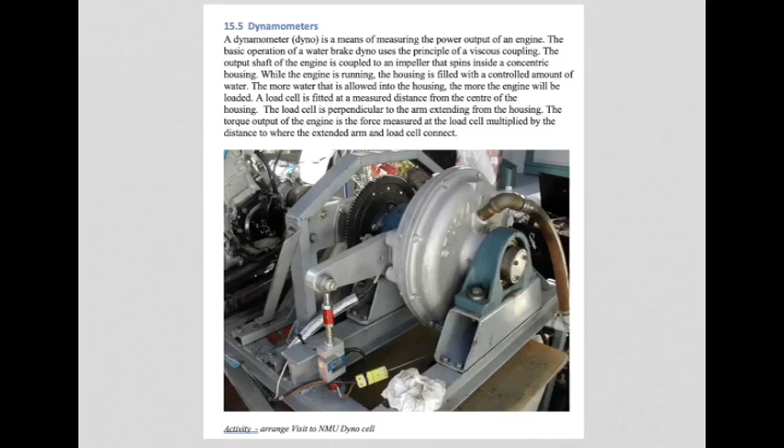So now would be a good time to add these two formulae to your summary sheet, and here it is in the most basic form. Power is torque times rotational speed. Here's the units defined: power measured in watts obviously, or joules per second.

Omega is our angular speed in radians per second, or if you prefer to work in revs per minute, it would be power is 2 pi NT over 60, where T is torque measured in Newton meters. And now angular speed is not in radians per second like it was in this formula, it is now in revs per minute.

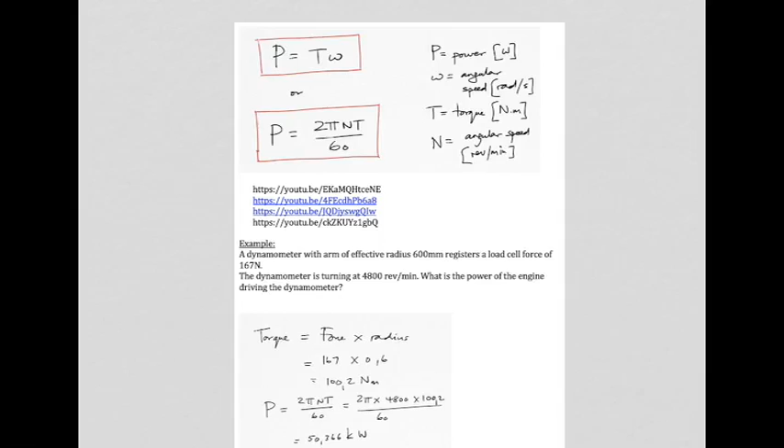At this point, I'd suggest you go and look at these various clips, which give you a number of different examples of dynamometers in action, which will better explain what we've just been through. You'll note that in some of those clips, the dynamometers are of the rolling road type, where they are testing the output of a motor car, and instead of removing the engine and connecting it to a dynamometer like in the first picture that I showed you, they instead put the drive wheels onto two submerged rollers, which are then rotated by the wheels of the vehicle, and those submerged rollers, underground or elsewhere, are connected to a dynamometer of a similar type to what we spoke of earlier.

So here's the simplest type of example. We are told that a dynamometer with an arm of effective radius 600 millimeters, remember what that was? That was the distance from the axis of rotation of the shaft to where the load cell was applied. That is 600 millimeters. In this example, it registers a load cell force of 167 newtons, but the dynamometer is turning at 4,800 revs per minute. What is the power of the engine driving the dynamometer?

Well, torque, as we said, is force times radius. So there's the force measured in the load cell.

There's the radius, obviously in meters. So we have 100.2 Newton meters.

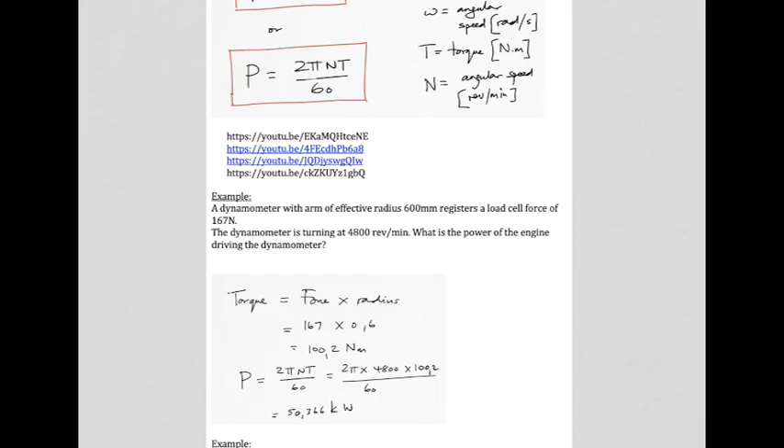Now we bring in speed of rotation, and we know that P equals 2 pi NT over 60. 2 pi times 4,800 revs per minute times the torque, over 60, gives us 50.366 kilowatts.

This next one is not a dynamometer as such, but it operates in exactly the same fashion. We are told a shaft runs in two bearings.

Whilst the shaft is running at 1440 revs per minute, there is a bearing drag of 2 Newton meters. Now that would indicate some problem with the bearing, poor lubrication, or a bearing that's starting to fail. The point is there is bearing drag, or the bearing outer housing is being carried along with the rotating shaft, to the extent of 2 Newton meters.

This is assumed to be caused by bearing friction, so as I said, a problem with the bearing. What heat will be dissipated by the bearing during 1 hour of operation?

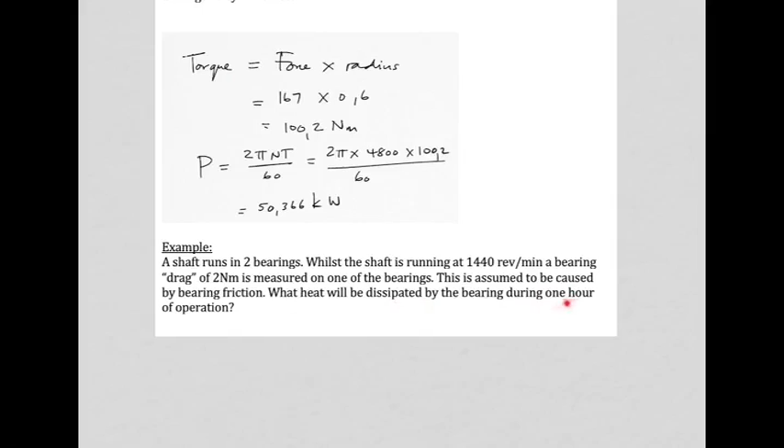Now that bearing would get warm because that energy has to go somewhere. And in this case, we don't have water like in the dynamometer taking the energy and getting rid of it somewhere else. It is staying with the bearing housing, and that bearing is going to get warm. How much heat are we talking about in 1 hour of operation?

Well, remember there was 2 Newton meters of bearing drag, so that's our torque. It was all happening at 1440 revs per minute. So we are talking about 301.59 watts, or as we know, that is the same as joules per second.

So in 1 hour, which is 3,600 seconds, the heat that you're dealing with is that times that, which would give you 1085 kilojoules of heat.

Now this very method is used in industrial applications for maintenance of machinery. If there is indeed a bearing that is giving trouble, this heat you can detect using thermal imaging devices.

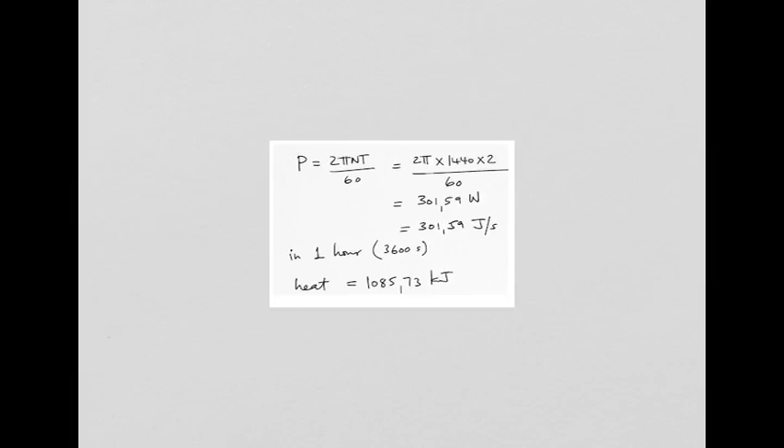So relatively quickly you could walk around a factory between the machinery with a thermal imaging camera and focus it on the various bearings of the different devices, and if you find one that is warmer than the ambient temperature significantly, you could suspect that there's a problem with the bearing, and then you could institute a maintenance plan to solve that problem.

Now we move on to a device called a Pelton Wheel, and I'd suggest you start by looking at this very good clip over here.

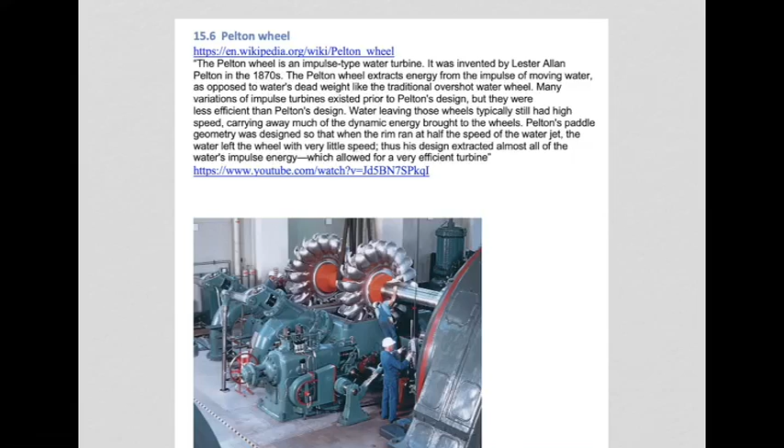But basically what you're going to learn from that clip is the fact that this Pelton Wheel extracts energy from the impulse of moving water, as opposed to various other types of water-driven device which are less efficient. This one is particularly efficient, and it is widely used whenever you need to extract energy from flowing water.

So where would you use a Pelton Wheel? That would be an obvious question. Well, if you have the need to generate electricity, maybe for your own needs or the needs of your industry, and you happen to have a source of water at an elevation above where you are, in other words, the water has head, and you are able to pipe it down to where you are, and ultimately rotate a Pelton Wheel, which in turn drives a generator, you can produce electricity. That would be first prize.

And there are parts of the world where such geographical conditions exist. In South Africa there are a few places, particularly rivers with a high fall. You can find those along the Transkei coast. There are quite a few small rivers that would be ideal for such applications, some farming applications.

And then on a larger scale, the energy utility Eskom also uses devices similar to this, but they use it for a different reason, and that is energy storage. What they do is, when electricity is in oversupply, certain times of the day when the power stations are producing more electricity than the grid requires, then they will use surplus energy to pump water to a high elevation.

A dam that is high up on a hill, and then later in the day when the electricity is in demand, they would then release that water back down the hill through the Pelton Wheel and make electricity and put it back into the grid. Obviously there's a loss in all of this, probably up to 20% is lost, but it still suits their needs to store the energy and then reuse it later when they need it again. So there are a number of those schemes in South Africa.

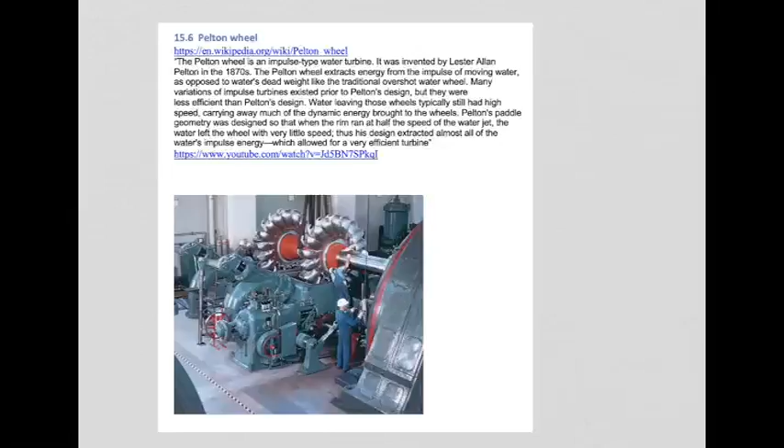Now if you are using it for energy storage, what you are basically doing is storing mass at an elevation, and remember that is what's called potential energy. So you could just as well lift a large concrete block of mass M through a vertical height h using a winch and a cable, and then run that weight downwards again, rotating the winch in reverse to drive a generator and make electricity. It would be exactly the same as what you're trying to do with water.

Now remember, specific weight you learnt in previous chapters was measured in newtons per cubic meter. That was the specific weight, the weight in newtons per unit volume, in this case a cubic meter. So the weight per second would therefore be omega times Q. The newtons per cubic meter multiplied by cubic meters per second leaves you with weight per second.

If we know how much is flowing, what the liquid is, what its specific weight is, and importantly how high it is, if we multiply those three numbers together, we get the potential power we can get out of the system. Obviously you can never get more than this. That is the physical limit.

Alternatively, you can look at it a different way. If you simply look at it as plain potential energy, if liquid is raised, it gains potential energy, which we know is mgh. Now the mass would be density times volume, so we would have density times volume times g times h.

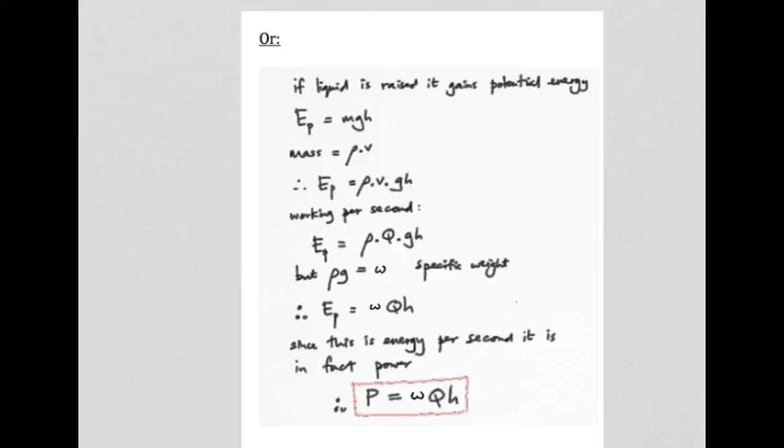And if we work per second, we would have density times Q - remember, Q is measured in cubic meters per second. But rho times g we know is specific weight, so we are back to specific weight times Q times H. And because it is energy per second, it is in fact power. So the power is specific weight QH, as we learned before - the same outcome.

Now, we often speak about the energy problems of our country and the load shedding we have from time to time. You'll hear and see many people trying to go off grid and make their own electricity, which is all great. They might have solar panels on their roof and generate electricity during the day, no problem at all. But what do they do to get through the night when there's no sun shining on those solar panels? Well, most people buy batteries and charge the batteries.

Well, how about using a solar-powered pump to pump water from a dam during the day when the sun's shining, getting it into a dam situated at a higher elevation on top of a hill perhaps, and then at night running that water back down through the device we've just learnt about, a Pelton Wheel, to power your household during the night.

Well, that sounds like a fantastic idea. Let's do some calculations via this problem to see how feasible that is. So let's read through the problem as it's given to us.

A small pumped storage system is depicted. That's what this would then be. A Pelton wheel is used to generate electricity at night by allowing water to flow from the top storage dam to the Pelton wheel, after which the water enters the lower dam. So its energy is extracted via the Pelton wheel, which then drives a generator, not shown, and the water would now be devoid of its energy and simply fall into the dam, which is right there.

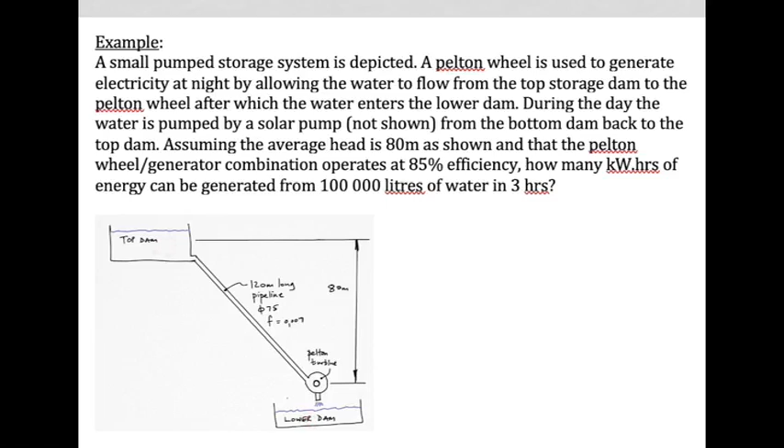Now, how many kilowatt hours of energy can be generated from 100,000 liters of water in 3 hours? So 100,000 liters of water will go from this dam to this dam in a period of 3 hours. During that time, how many kilowatt hours of energy will be generated? Well, let's start by looking at the flow, the discharge.

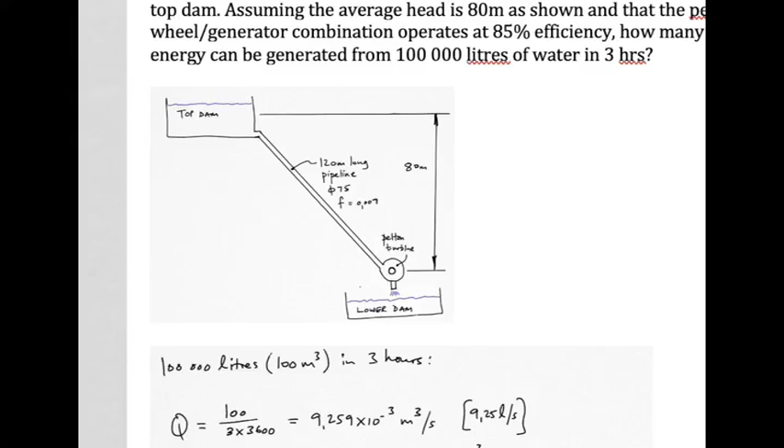If we have 100,000 liters, which is 100 cubic meters by the way, and it is passing through the pipe in 3 hours, what would be our discharge? Well, discharge is measured in cubic meters per second, remember. So we're dealing with 100 cubic meters in this many seconds, which would be 3 hours times 3,600, since there are 3,600 seconds in 1 hour. So we are dealing with 9.259 times 10 to the minus 3 cubic meters per second.

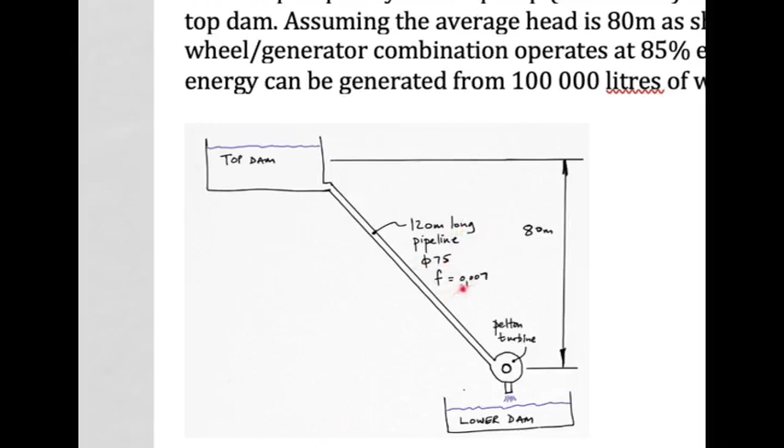Now, what's not written in the question in words is on the sketch here, and that is the fact that there is friction in the pipeline as well. The pipeline is 120 meters long, it has a diameter of 75 millimeters, and we are told that the friction coefficient is 0.007. So we had better take into account the head lost to friction, which we've done in previous work, but let's see how we can work that out.

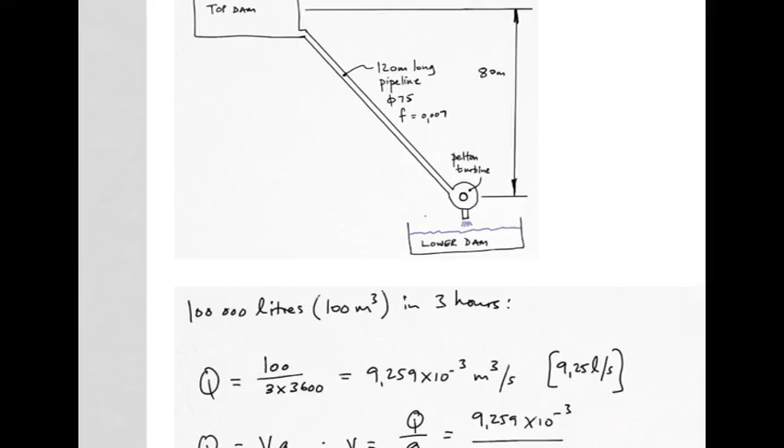If we look at the friction formula, we need to know the velocity of flow. So let's see if we can work that out. Remember that Q equals VA, so V is Q over A. Q is our discharge, over the area, the cross-sectional area of the pipe, pi over 4 d squared, meaning that the average velocity in the pipe is just over 2 meters per second.

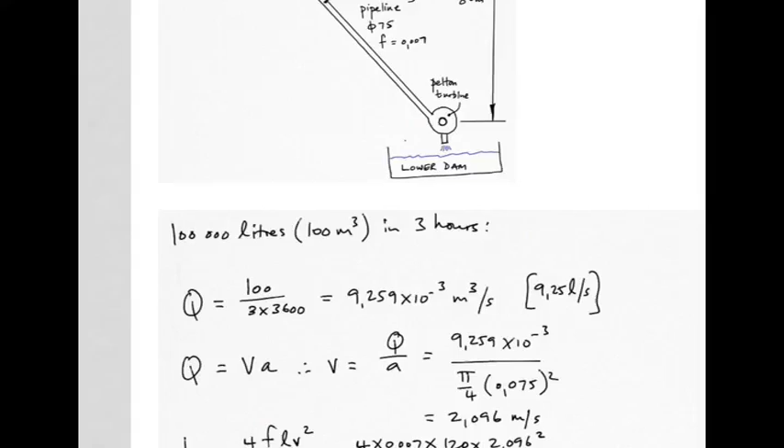And our friction formula, the Darcy formula, says head loss to friction is 4 times the friction coefficient times the pipe length times the mean velocity squared over 2dg, diameter times g. So it's 4fLV squared over 2dg. It means that roughly 10 meters of head is lost to friction. So of that precious 80 meters, 10 is going to be lost to friction.

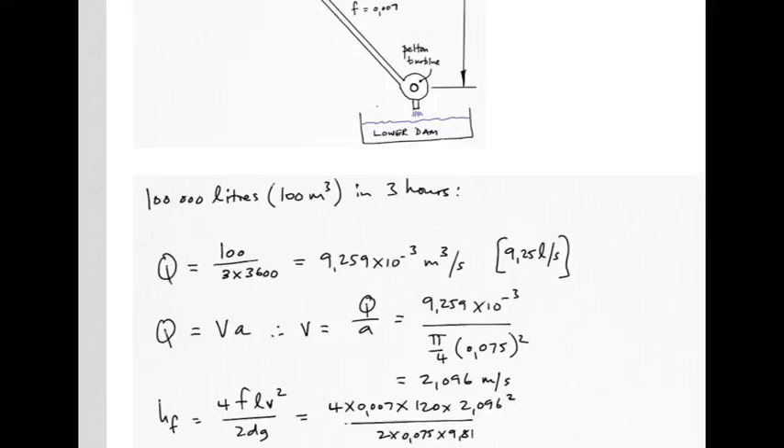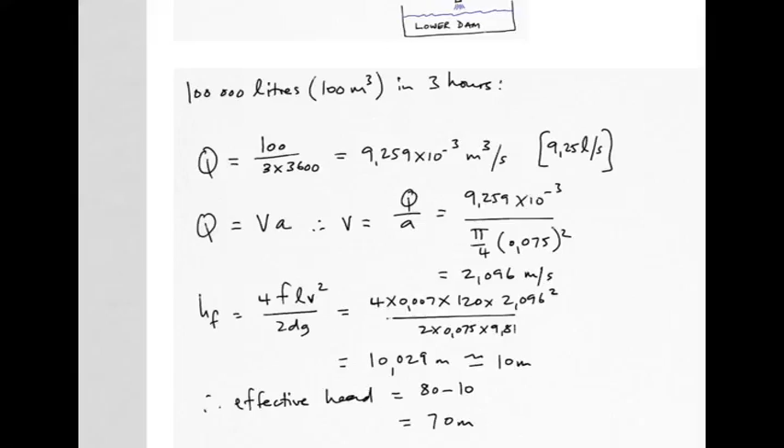Remember, the only way to minimize that would be to use a bigger diameter pipe and drop the velocity of flow, but there'd obviously be an expense involved. So the effective head is 70 meters.

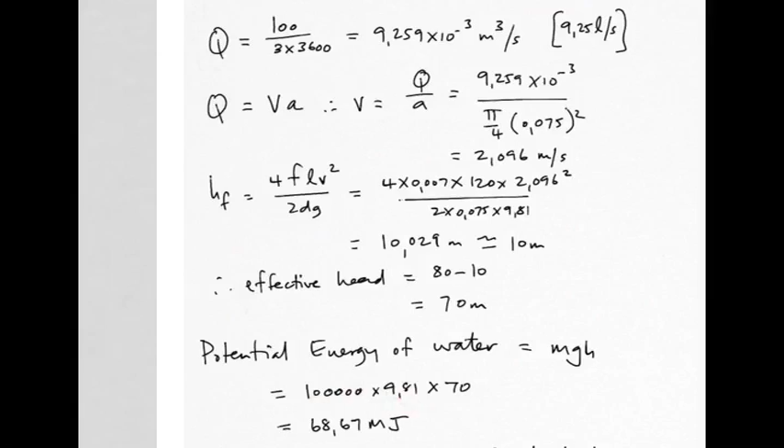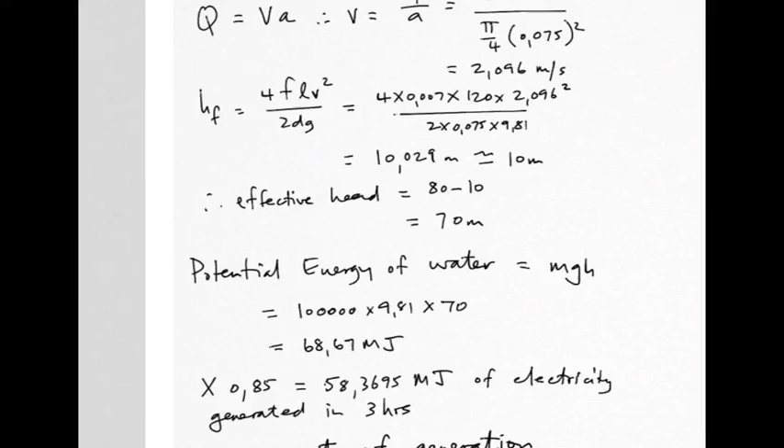So our potential energy of the water is mgh, as we know. So we have a mass of 100,000 kilograms of water times 9.81 times the available effective head of 70 meters. We are dealing with 68.67 megajoules of energy. And remember, only 85% of that is available to us because of the losses in the machinery at the bottom. So that is how much is left for us to use.

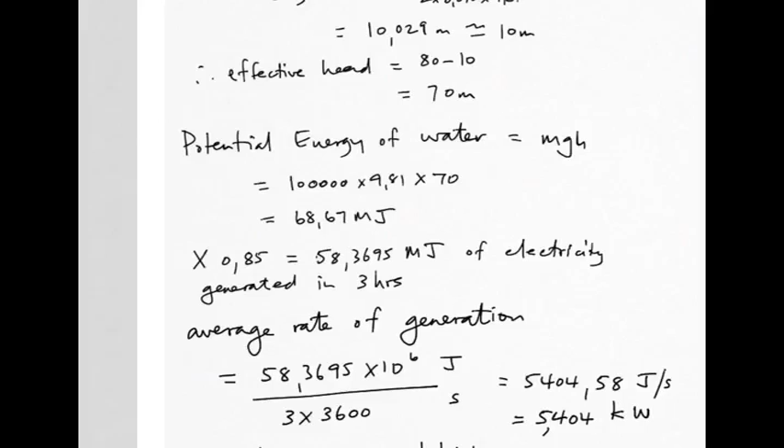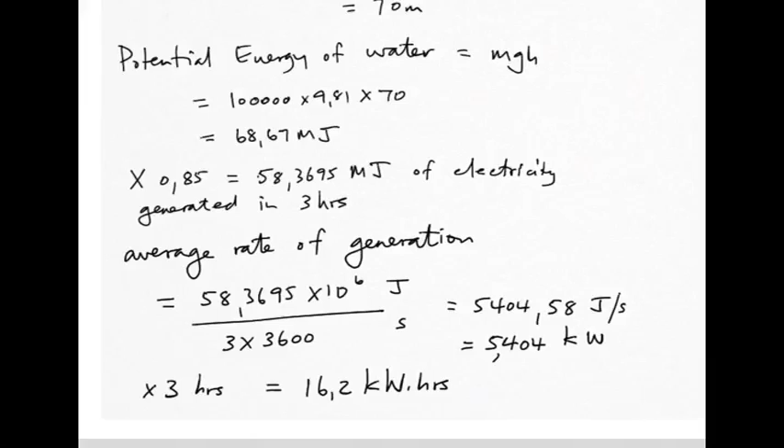And if we're going to use it in 3 hours, the rate of energy generation would be the total divided by the time involved, which is 3 hours, each hour being 3,600 seconds. Meaning that we are dealing with 5404 joules per second, which is 5.4 kilowatts. And kilowatt hours, remember, are the number of kilowatts you are dealing with multiplied by the number of hours you do it for. So that would come out to 16.2 kilowatt hours of energy.

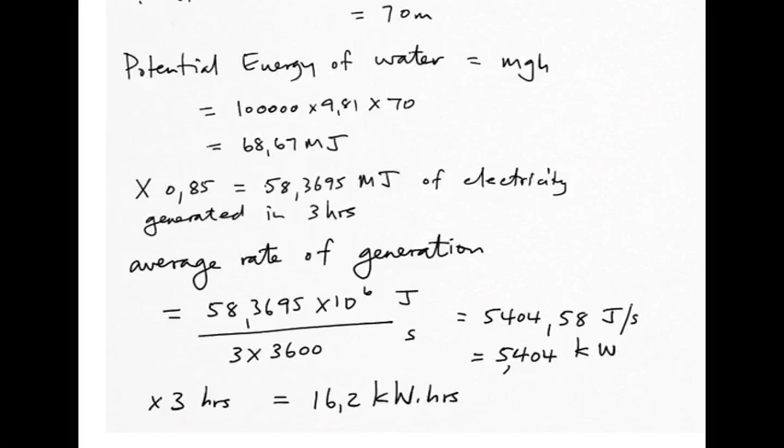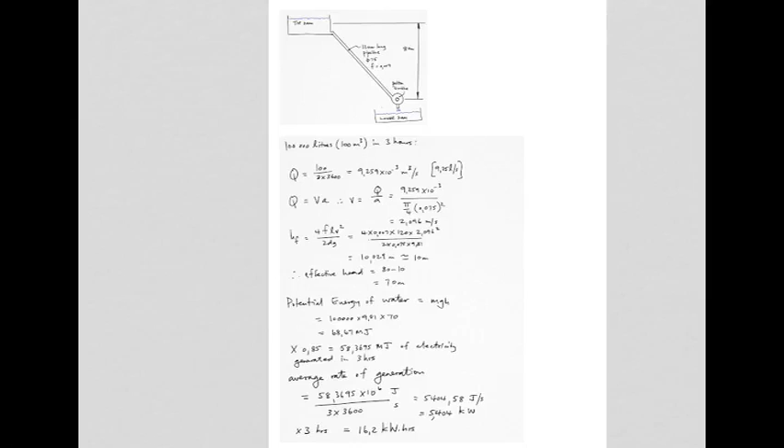So in summary, this pumped hydro system with its 100,000 liters of water at 80 meters would only produce 16.2 kilowatt hours of energy storage, which might or might not be enough for your application.

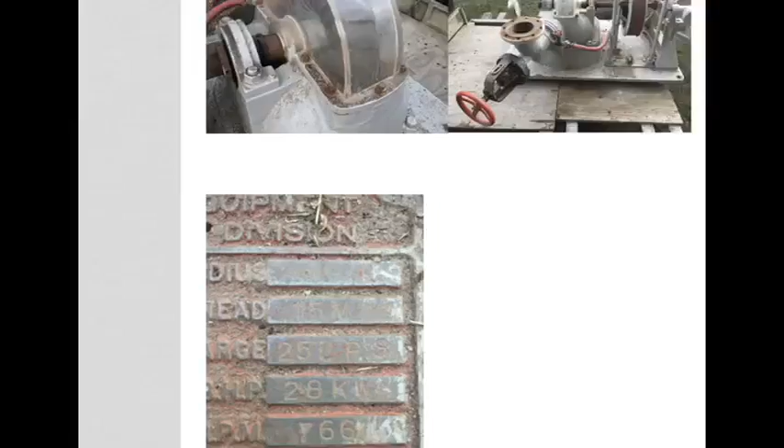Now here's a practical example of a real Pelton wheel, and there is the data plate on it. If we zoom in, this manufacturer is claiming that at a 15-meter head, with a discharge of 25 liters per second, the device can produce 2.8 kilowatts. So let's see what that works out to as an efficiency.

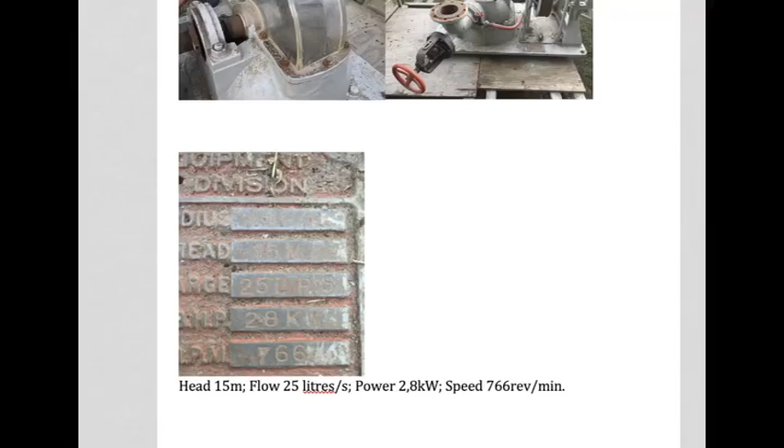We must calculate the manufacturer's claimed efficiency of the Pelton wheel. Oh, and the speed of rotation was 766 revs per minute.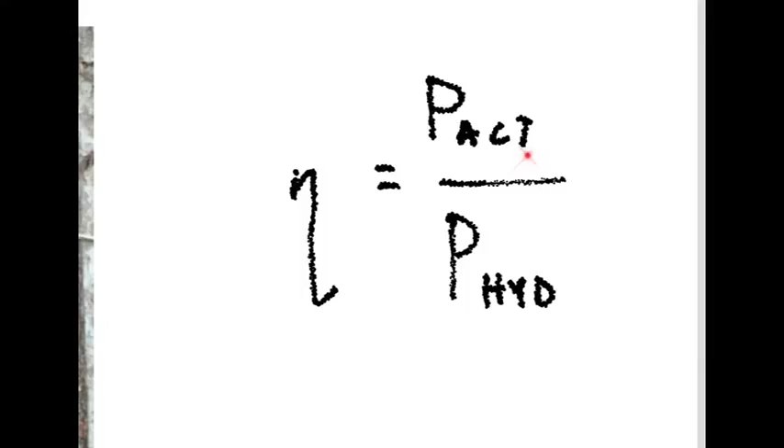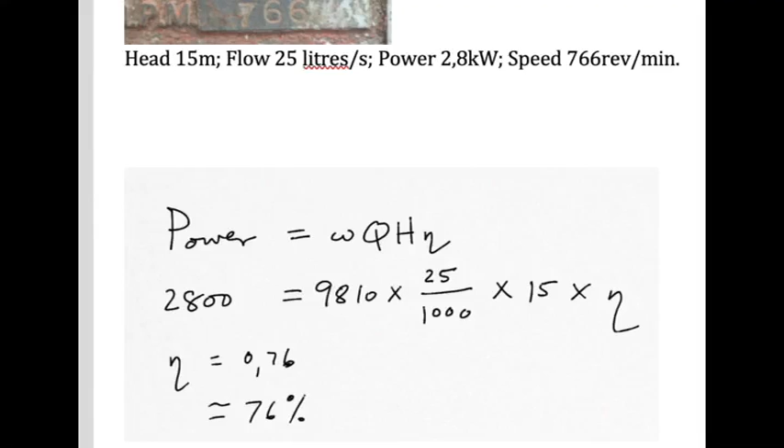Now, efficiency in this case is actual power derived from the unit divided by the hydraulic power that it used. So we could put it a different way: actual power, which they're claiming is 2.8 kilowatts, is equal to the hydraulic power multiplied by the efficiency. So if we solve for the efficiency, it turns out that this machine, they are claiming a 76% efficiency. So it produces 76% of the hydraulic power as a shaft output from this particular Pelton wheel.

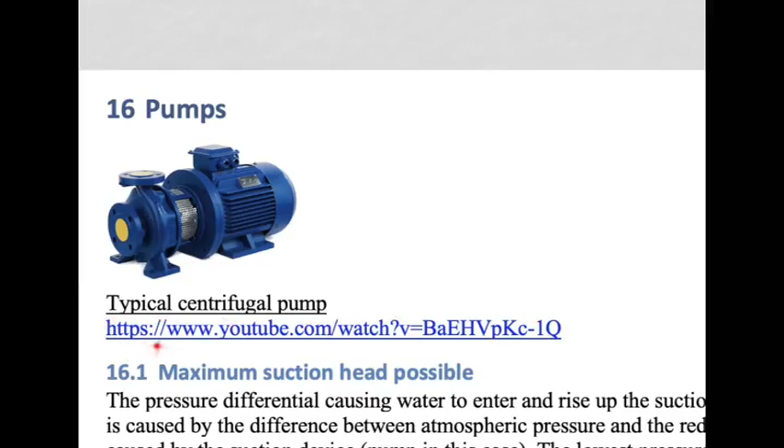So I would strongly recommend you take a look at this clip over here, which is quite good at explaining the workings of a typical centrifugal pump.

Now, before we go any further, let's sort out this matter of the maximum suction head that is possible with any pump. The pressure differential causing water to enter and rise up the suction pipe of a pump, this is the suction pipe, is caused by the difference between atmospheric pressure and the reduced pressure caused by the suction device, the pump in this case. So the pump is causing low pressure here, and it is allowing the water to rise up and enter into the pump at that point.

But now here's the crux. The lowest pressure attainable is 0, hence the maximum theoretical suction head possible is 10.32 meters at sea level. Okay, so in practice you can never get to 10.32 meters, regardless of how good your pump is or how much power you're putting into it. The point is, you cannot have the pump more than 10.32 meters above the surface of the water from where you are drawing. In reality, you can never actually get close to 10.32.

It should always be much less. But the bottom line is the pump should always be mounted as low as possible to prevent other issues such as cavitation and the need for priming.

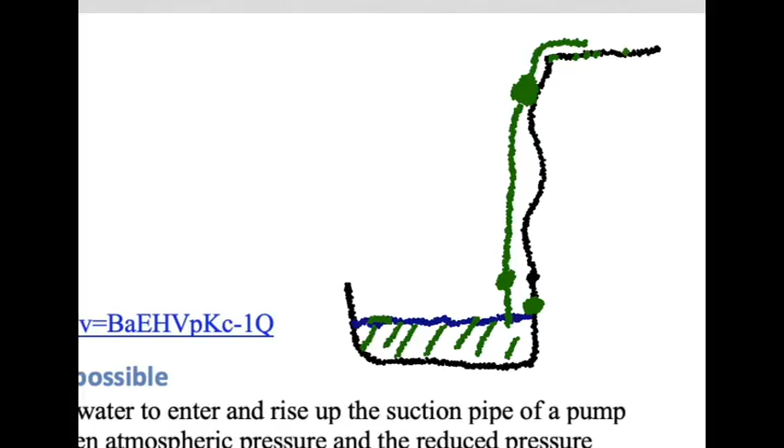So in other words, if this was a river, there's the surface of the water, and here's a mountain, for example, over here, and you want to get the water from the river to the top of this mountain, and you want to install a pump. To go and install the pump up here and ask it to suck water from the river far below and deliver it to where you want to go might sound feasible, but it's not, because this pump has to be within 10.32 meters of the river surface, or preferably right down as close to the water as possible, because otherwise if you mount it anywhere higher up, it simply won't pump regardless how much power you put in, because the pressure differential will just not be enough to get the water into the suction side of the pump. Let's look at why that is.

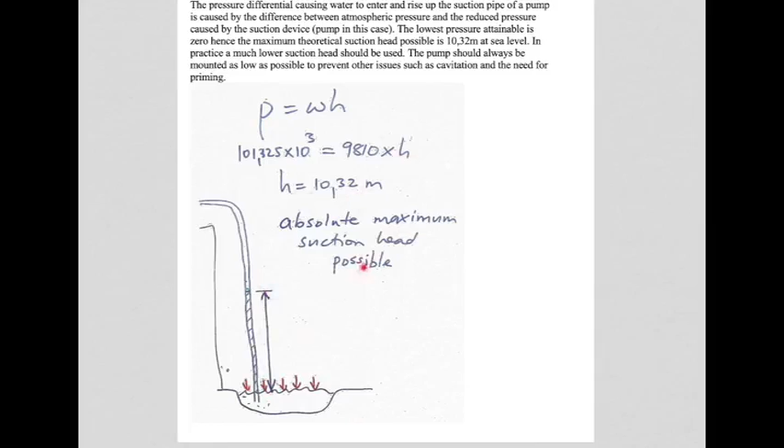This example shows that the water rising up the suction pipe to the pump is done so because we have zero absolute pressure inside here, and atmospheric pressure acting down on the surface of the water. The best we can get in terms of height is atmospheric pressure equals specific weight of the water times h, which we solve for, and we find that 10.32 meters is the absolute maximum suction head possible, for atmospheric pressure on planet Earth.

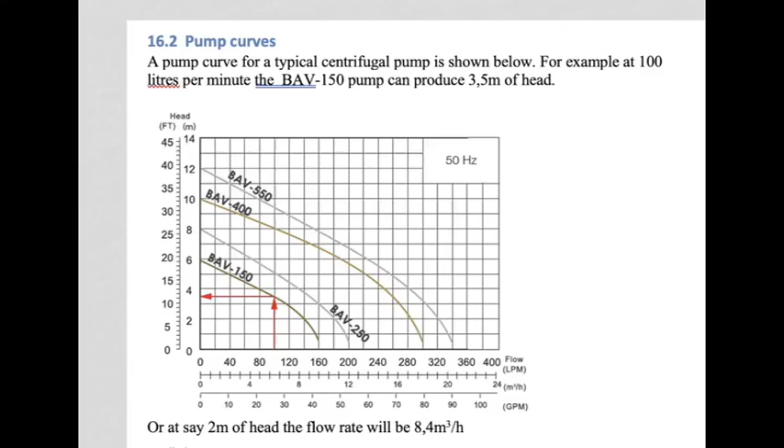They've done performance testing on it, and found at various heads you get various flow rates. Conversely, at 2 meters of head, we could go across until we reach the pump curve, then down, and see the flow rate is 8.4 cubic meters per hour. So for each head you can find a corresponding flow rate and vice versa for that pump, and that is how you select the pump for your particular application.

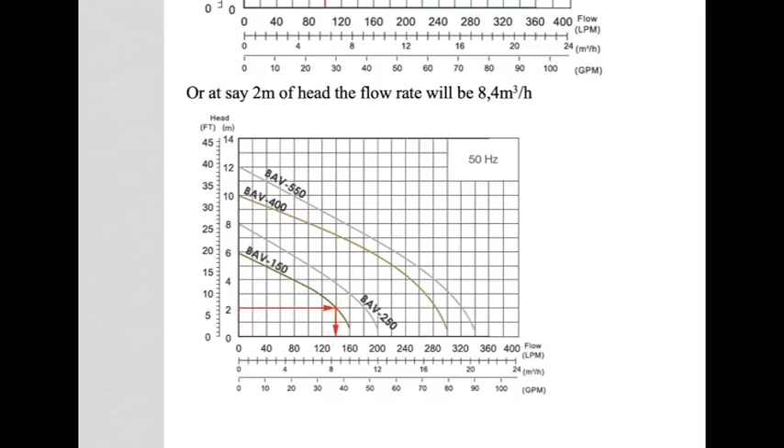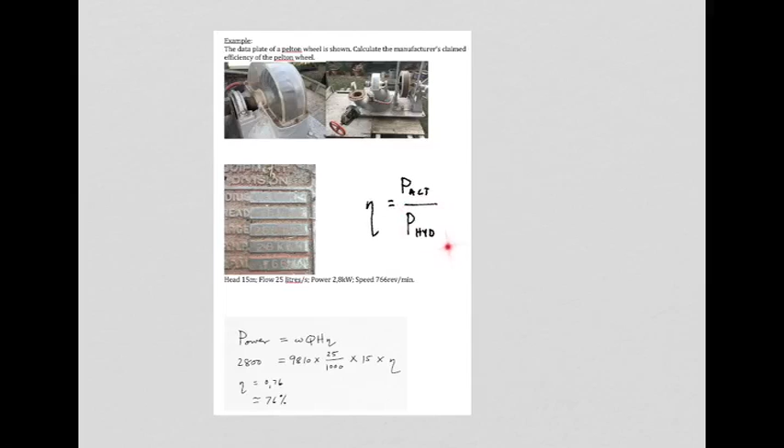Earlier we looked at efficiency for a Pelton wheel, taking the lesser number divided by the potential number, giving a ratio between 0 and 1 called efficiency. In the same way, we apply efficiency to a pump, which is the actual hydraulic power achieved divided by the input power to the pump. It works in the opposite way to the Pelton wheel - we supply power to the pump and achieve hydraulic power from it. Hydraulic power is the rate of work done on the water.

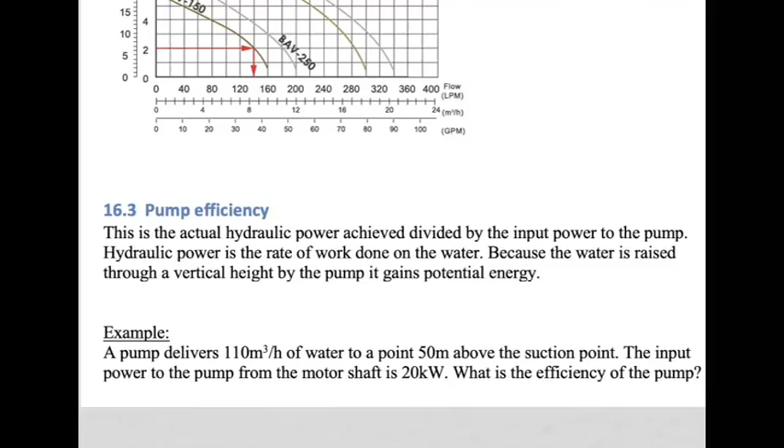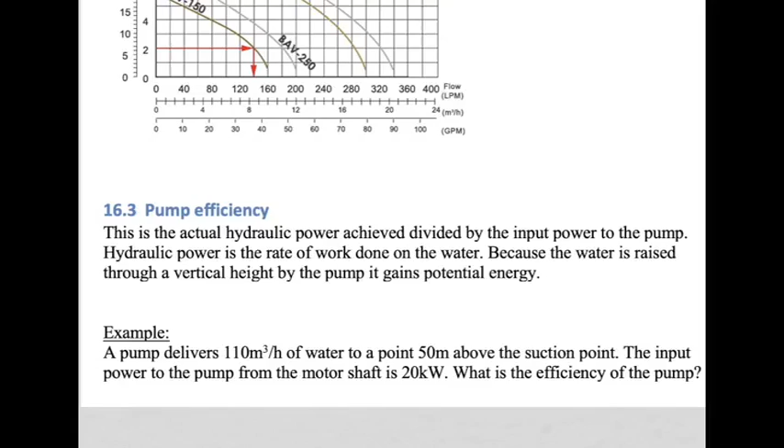Because the water is raised through a vertical height by the pump, it gains potential energy. The pump is driven by a prime mover, an electric motor or petrol engine, and we get hydraulic power out of it. Remember, hydraulic power is specific weight times Q times H, and we can work out the pump efficiency if we know those values. Let's look at an example: a pump delivers 110 cubic meters per hour of water to a point 50 meters above the suction point. The input power to the pump from the motor shaft is 20 kilowatts. What is the efficiency of the pump?

Let's look at the hydraulic power we achieve: specific weight times Q times H. Specific weight is 9810 newtons per cubic meter, discharge is 110 cubic meters per hour, so we divide by 3600 to get it per second, times the 50 meters we raise the water through. Our hydraulic power is 14.98 kilowatts, but we put 20 kilowatts into this device from the electric motor, and we only got 14.98 kilowatts of hydraulic power out, meaning it was running at 75% efficiency.

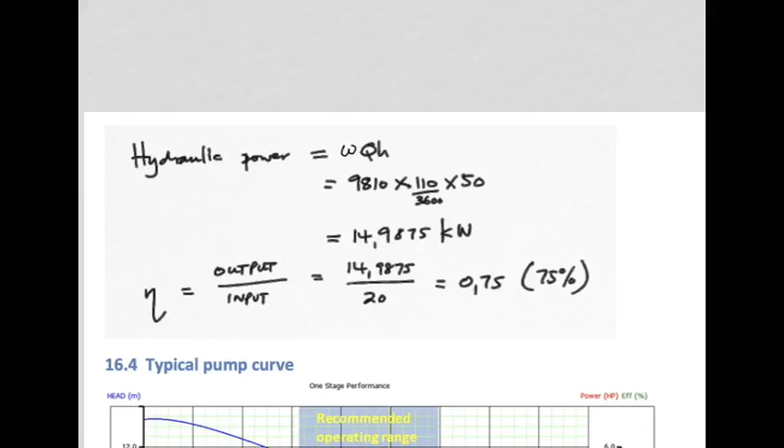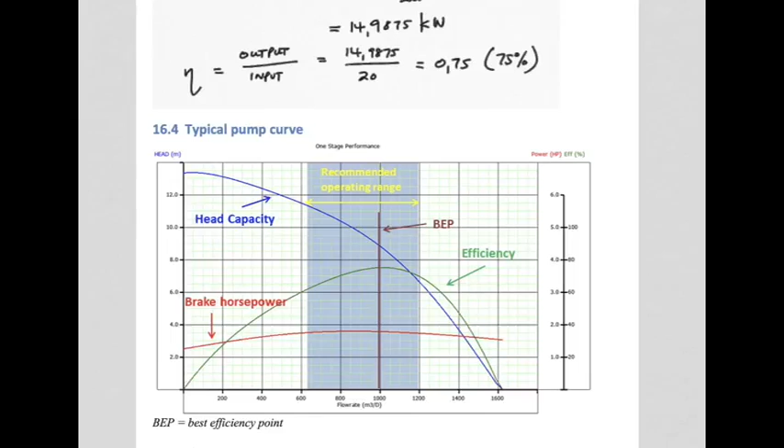Moments ago we looked at a pump curve with head against discharge as a single curve, but we can get a more elaborate pump curve by adding another scale on this side, a dual scale of power and efficiency. Now we can add further curves to the same graph - this was the pump curve we saw earlier, the blue one. If we plot the efficiency we just worked out at various points of flow rate, and look at the efficiency scale, we find the efficiency is not always the same.

It definitely peaks at a certain point and then starts to drop off again. If we did the calculation we did earlier for each point on the curve of the pump, at each flow rate versus head situation, we would have various efficiencies. If we were to plot them, we would find a spot where the efficiency was at the greatest. In the perfect world, we would like to run our pump always at that spot, so as to achieve the most output for the amount of input we are giving the pump. In other words, at the most efficient point.

In reality we can seldom run at exactly that sweet spot, so we would have a range either side that we would like to operate in, and in this particular case they're saying the recommended operating range would be in this zone.

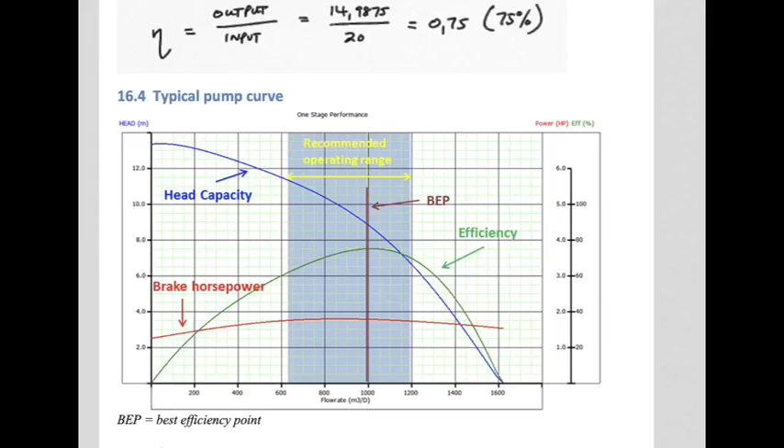Let's start by using the blue and the green curves only and calculate the shaft power required to pump 50 cubic meters per hour with this pump. Now 50 cubic meters per hour, we need to get it to days because that's what our axis units are. So we multiply by 24 and we get 1200 cubic meters per day.

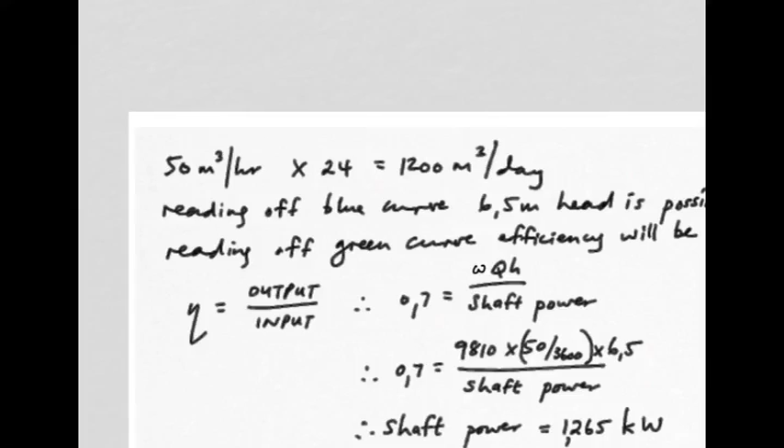So now we read off the blue curve and we find that we can do 6.5 meters of head, and then we read off the green curve and we find that the efficiency will be 70%. Let's go and look at that. So we take 1200, we go up to the blue curve, across, and we find our 6.5 meters of head.

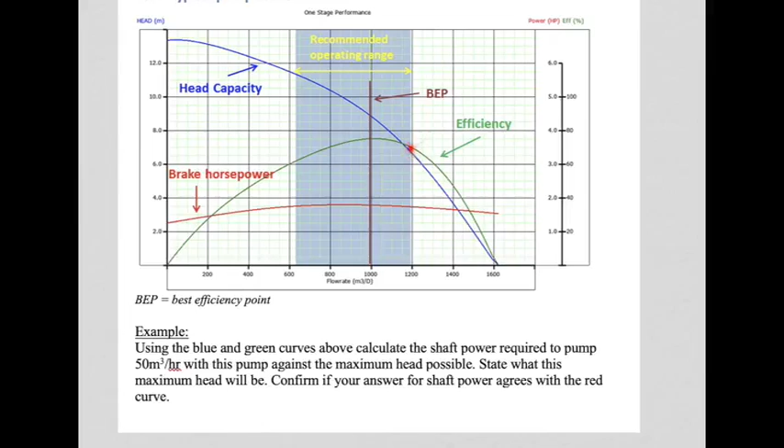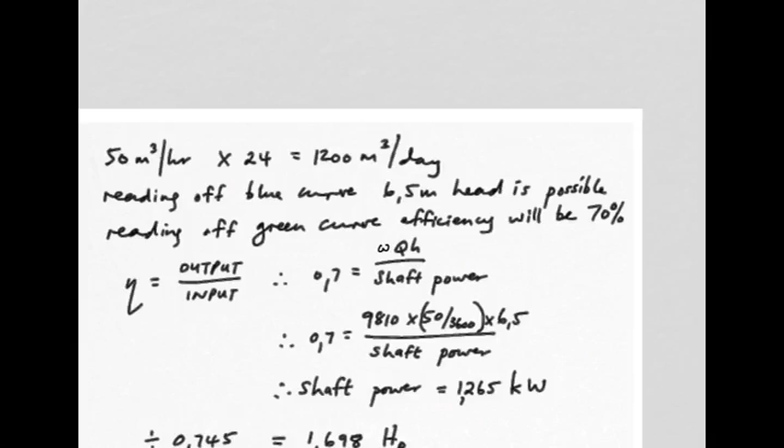And we also note that the efficiency is 70%. Okay, so if the efficiency is 70% and our output is the hydraulic power of specific weight QH, we can solve for the shaft power that we should be requiring, and that comes out to 1.265 kilowatts. Now this graph has the power expressed in horsepower, and remember the conversion is 0.745 between kilowatts and horsepower. So you divide 1.265 by 0.745, which makes the number bigger, which is correct, and comes to 1.698 horsepower. Let's call it 1.7 horsepower.

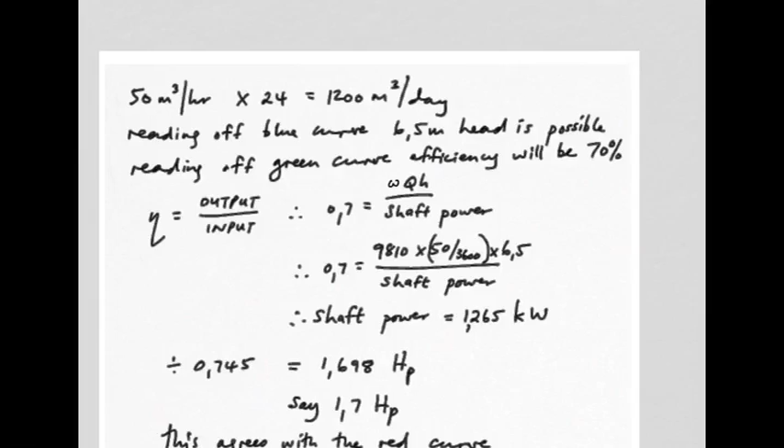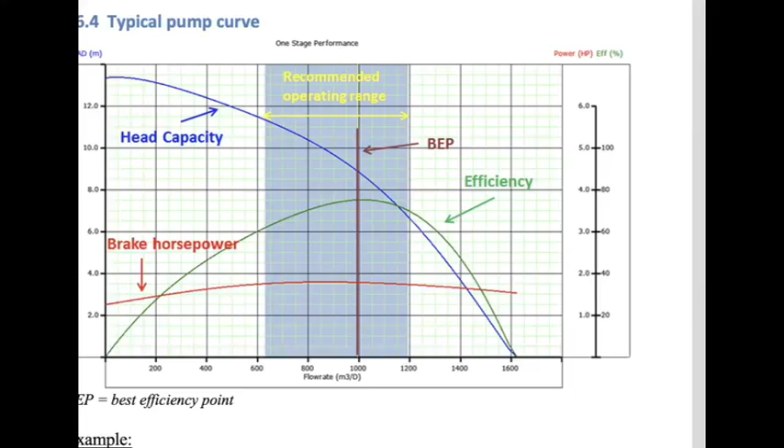So let's go back to the graph. Now we're looking at the red graph, which is power expressed as horsepower, and we go here and across and we see it looks like 1.7 horsepower. So we could have simply read it off the graph, or as you can see, the calculations can be used. If you are lacking, for example, the power curve, you could work it out, and vice versa. This particular graph with all these various curves just does some of the calculations for you, but it's important for you to know where the calculations come from.

The final type of pump we're going to look at is a multi-stage submersible type of pump. Basically, it's a number of centrifugal pumps stacked one on top of the other, and the outlet from one pump becomes the inlet of the next, and so on. That way the pressure output of what's essentially a centrifugal pump is greatly enhanced. A centrifugal pump typically is not a high pressure pump, but if you do it this way and make it multi-stage, you can obtain significant pressure from the very simple centrifugal type pump.

The submersible type is often used in a borehole environment, so it's a long, small diameter, narrow type pump. I would strongly recommend that you go and look at a YouTube clip such as the one over here to get an idea of the workings of a submersible multi-stage pump. And the next problem is going to focus on one such device.

In this final example, an actual product out there made by Grundfos is used as the basis of the problem. In this case it's a 10-stage SP8A-10 Grundfos pump, a submersible centrifugal pump, used to pump water from a river to a dam situated 50 meters higher than the river. So the head must be 50 meters there.

The pump is powered by a solar source, hence assume that it only operates for 6 hours a day. So when there's sun, the pump runs, and when there isn't sun, the pump is off. At night, all the water in the dam is allowed to flow back to a Pelton Wheel situated at the level of the river in 2 hours. So whatever went up during the day comes back in 2 hours.

The 50mm diameter pipeline from the dam to the Pelton wheel is 75 meters in length and has a friction coefficient of 0.007. Neglect friction losses in the pipeline from the pump to the dam. So you don't have to worry about friction on the way up, but it looks like you do need to worry about it on the way down.

Question 1: what quantity of water in litres will be in the top dam at sunset? And then use that answer to calculate the hydraulic power attained and hence the pump efficiency. And then finally, assuming that the Pelton wheel generator combination has an overall efficiency of 88%, how many kilowatt hours of electricity can be expected to be generated per night?

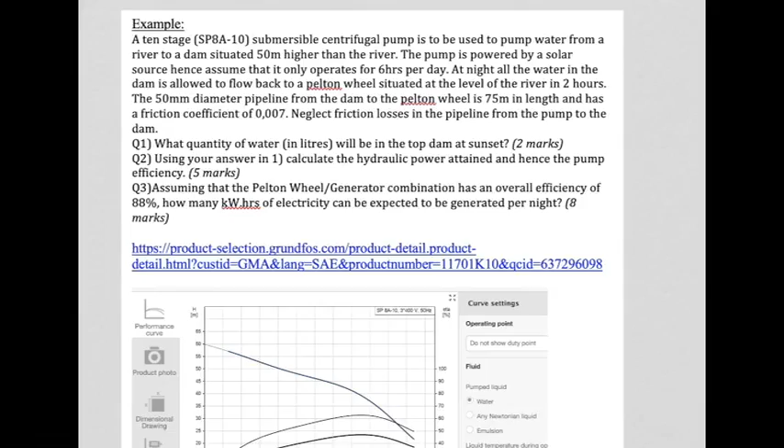Okay, so spend some time on this one. Look at that link and the data sheet on that pump, you're going to need that. And here is another resource for you, which is the same curve, SP8A-10, that is the same as that curve there. And here's the power, which is expressed on both graphs, so you can use either resource to work that out. So make a good attempt at that. Stop the video now and have a go at that one.

So the SP8A-10 at 50 meters head can do 4 cubic meters per hour. For 6 hours a day, that is 24 cubic meters per day, which is 24,000 liters.

Next is the hydraulic power. Specific weight times discharge times head gives us the hydraulic power. Specific weight of water is 9810 newtons per cubic meter. Discharge through the pump is 4 cubic meters per hour, so that is 4 cubic meters divided by 3,600 to get it to seconds, cubic meters per second, times the 50 meters head that it is pumping through. That is 545 watts.

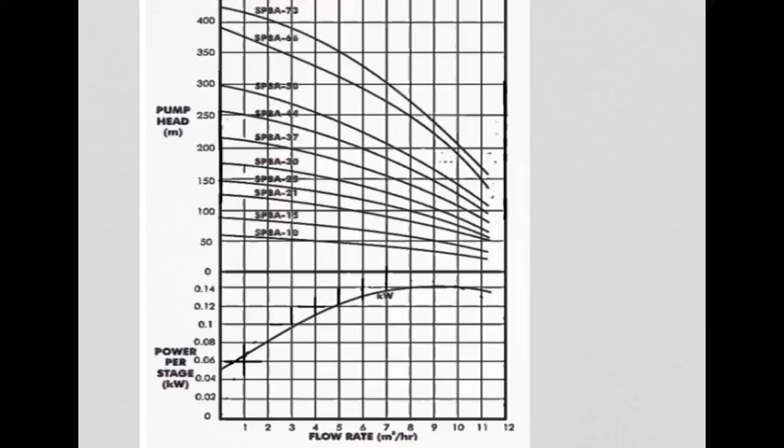Right, how much power is the pump using? Well, we've got 50 meters head, and if we go down, remember we were doing 4 cubic meters per hour, so here's our line. On the power curve, it looks like 0.11 kilowatts, but that is per stage, and remember it's a 10-stage pump. So 0.11 kilowatts per stage times the 10 stages. Remember there's 10 centrifugal pumps effectively packed on top of each other. The total is 1.1 kilowatts or 1100 watts.

How efficient is our pump? Well, it's giving us 545 watts of pumping power, hydraulic power, yet it's using 1100 watts of electricity, so it is 49.5% efficient.

Now onto the Pelton wheel. At night, those 24 cubic meters flow back in 2 hours, so that would be 3.33 times 10 to the minus 3 cubic meters per second flow rate through the Pelton wheel. Velocity of flow in the pipeline that supplies the Pelton wheel, remembering it's a 50mm pipeline, Q is VA or V is Q over A. So there's our discharge, there is the pipe area, pi over 4 d squared. It means that the flow velocity is 1.7 meters per second average in that pipe.

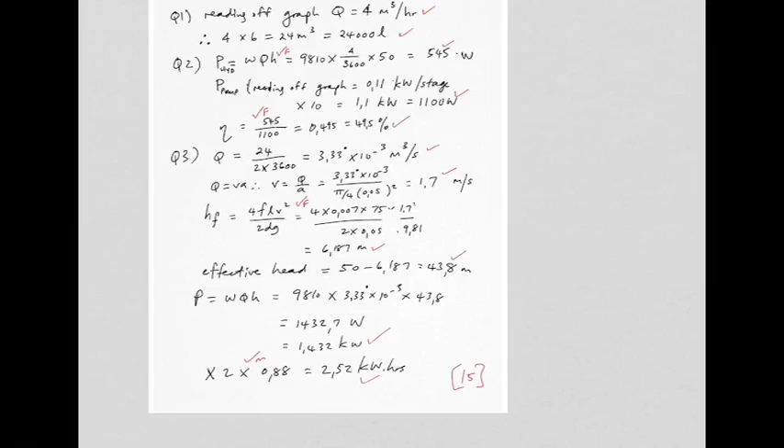Darcy formula, 4FL V squared over 2dg, means that 6.187 meters of head is lost. So of the 50 meters that we had in total, we lose 6.187 meters, so we're only left with 43.8 meters effective head. So what power can we get out of the Pelton wheel?

Well, hydraulically, we have 9810, which is specific weight of water, times the discharge, times the 43.8 meters effective head. It means that the maximum power, the hydraulic power, would be 1.432 kilowatts.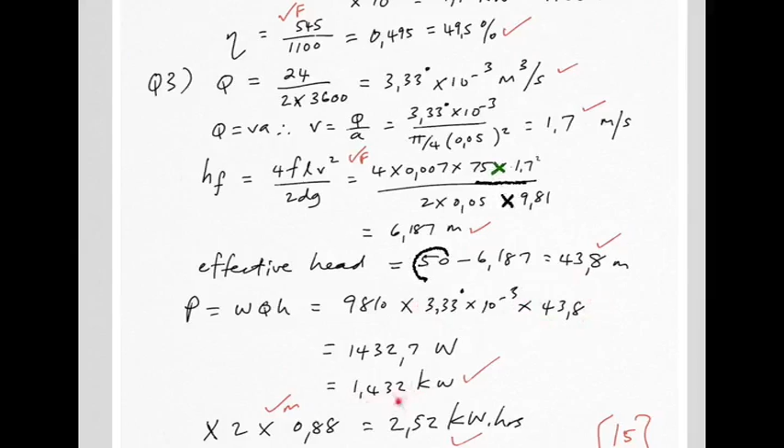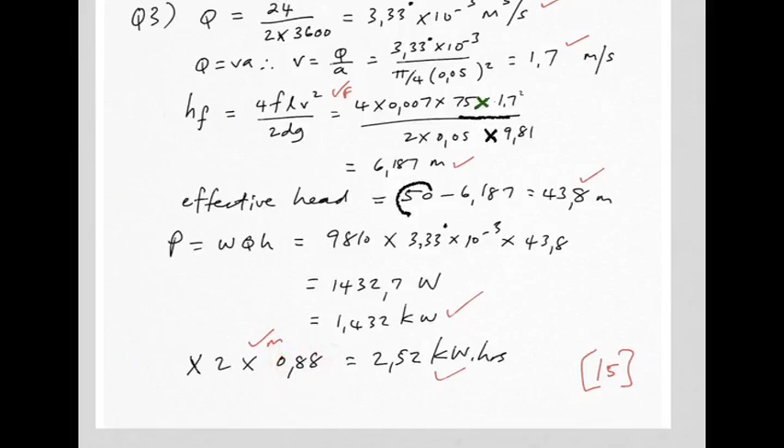And remember, we're working for 2 hours. We multiply by 2 to get kilowatt hours, but we have to reduce the number because of the inefficiencies of the Pelton wheel generator combination at 88%. So we multiply by 0.88. So all we get out of the system ultimately is 2.52 kilowatt hours.